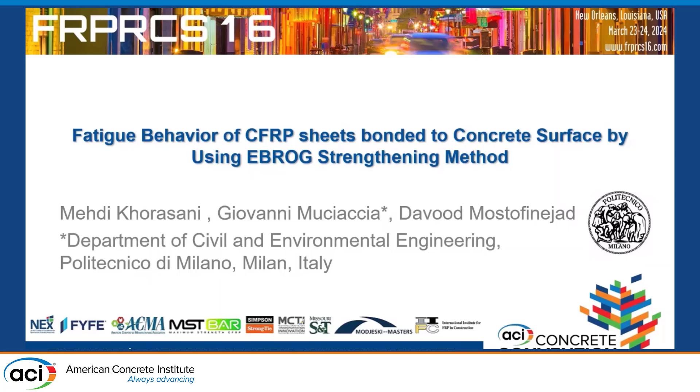As per the introduction, my main focus is typically on innovative cementitious materials and anchorage fastening, so I'm a little bit a guest in the FRP context, and I will try to explain what we are trying to do with the colleagues.

So I will skip this, and let's start from this. Let's consider something a little bit more general. By the way, sorry for the format - I realized during the presentation this morning that something wasn't working with the format we tried to use in the ACI format, so it's a little bit different than others.

One of the issues we know well is when passing from the specimen we typically make in the lab to real structures, we have some boundaries, some geometrical boundaries, which force us to some extent to use specific solutions to guarantee the effectiveness of the strengthening.

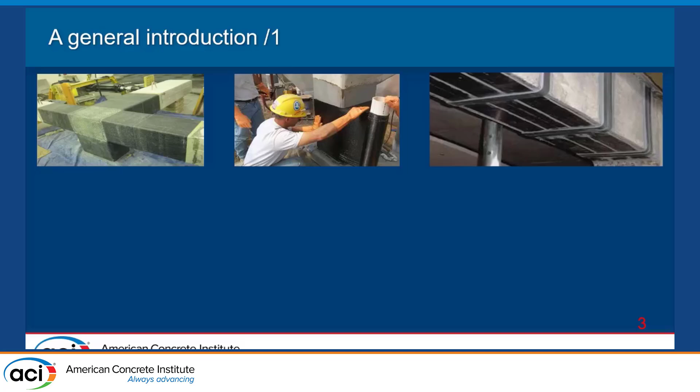One of them, for instance, is the CFRP anchor, on which a lot of this cooperation we started is working, which we are also starting to investigate through experimental techniques and analytical methods more typical of fastening technique, which is what you see on the right.

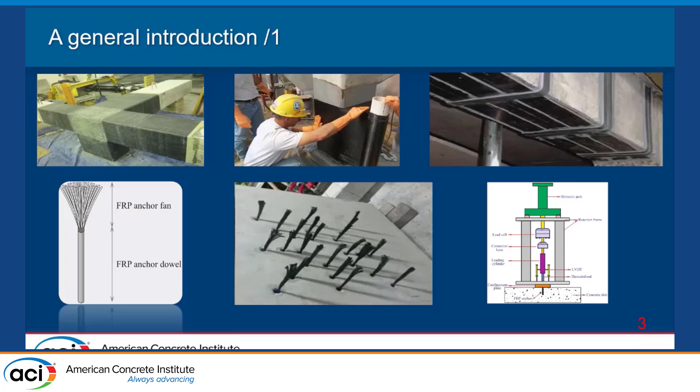In this field we obtained some results which I would like to quickly show. For instance, we started to investigate the sensitivity to installation, regarding how you clean, and what can be the effect of the sensitivity technique, and capacity prediction, which is in the middle, through models more typical of fastening.

For instance, prediction regarding models which look at concrete capacity, or the bond, through models which can be applied to different conditions you may have, and this seems to work pretty well. Or even the behavior under temperature, evaluating the decay, for instance bond strength, through techniques borrowed from other fields. This is a little bit to give you the idea.

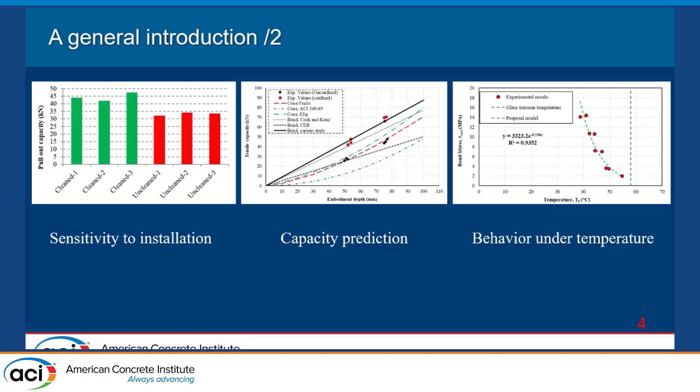Even if I will not focus specifically on FRP anchors today, as you may see from the presentation, but on another technique which may be used when we have geometrical boundaries, maybe developed by the colleagues in the past, which you may know - I can skip this - when you basically have some issues in the anchorage, you may want to use some grooving methods.

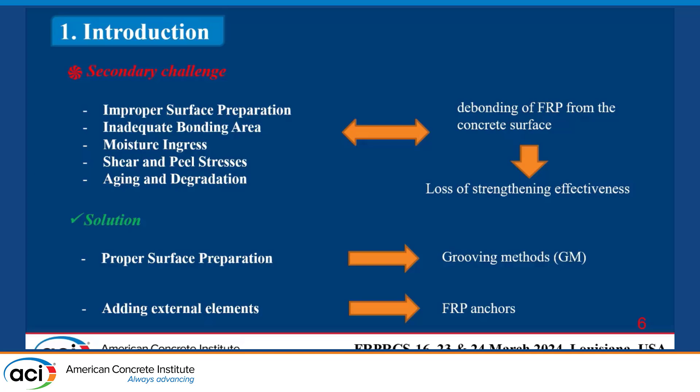So grooves basically are here. Assuming that this will not... okay. You know well the basic preparation you may have in the standard case, and also some techniques coming through the last year, so near surface mounted. The grooving basically consists in wanting to have some mechanical interlock which may help us a little bit. We cut through the concrete, and then we let the resin go in.

Of course this may be coupled with other things which are under evaluation today, so having in the groove not only the resin or matrix, but also, let's say, to have the strip which can go through the matrix. Anyway, these are coming - let's put it like that.

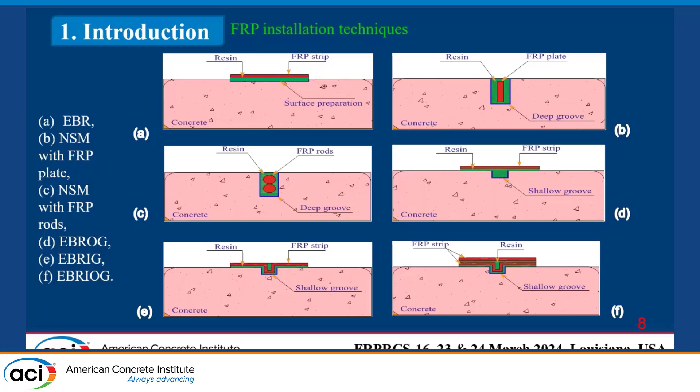I will focus a little bit today on this specific technique in one specific condition, which is the assessment of the fatigue behavior, or specifically the resistance in this case, as we'll see. So what I will talk about in the next minutes is the evaluation of the efficiency of the EBROG method on bond properties of FRP composites under fatigue loading.

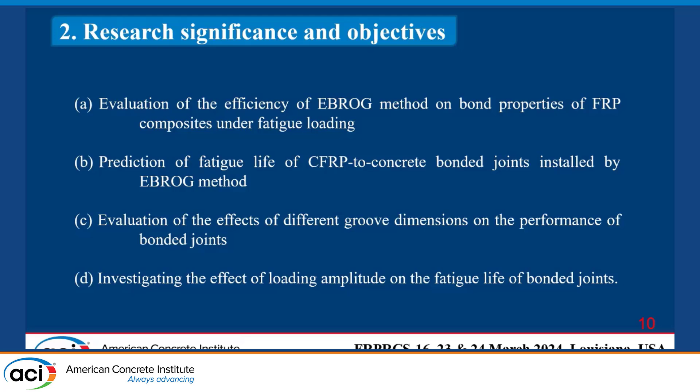We try to see if this can be predicted somehow, and show some possibilities: the evaluation of the effect of different groove dimensions on the performance of the joints, and a little bit the effect of the loading amplitude on the fatigue life of bonded joints.

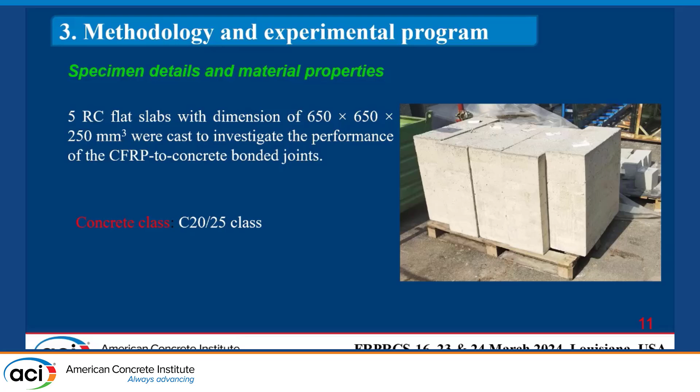So to the scope, we casted some specimens in our lab, so we casted our slabs. The concrete class is the basic one.

This is the bonding material, the fiber adhesive that we use, not because we had some specific agreement with the manufacturer, just because it was available on the market, so we're also promoting somehow this, but it's indirect.

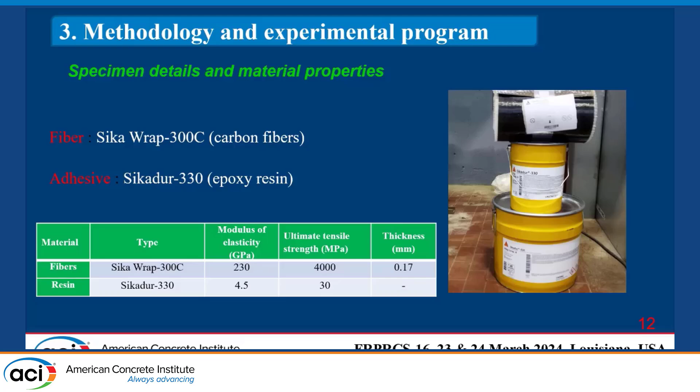So the methodology of preparation: this is the procedure we follow for the standard method, the standard bonded reinforcement. We remove the weak thin layer of concrete, then apply the epoxy-based adhesive, and then the sheets after impregnation, as known.

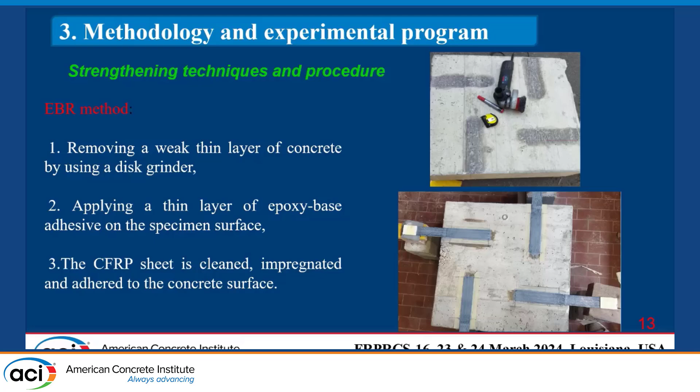I just want to stress the only difference we have in the EBROG method: before doing the rest, you cut the concrete.

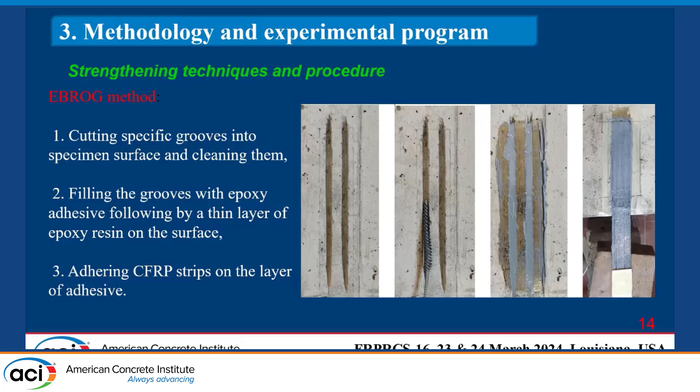This was done through lab tools, which can actually be easily available also on the job sites. You cut through the concrete, then you clean—this seems trivial, but it's not—here we see some brushes. Then you proceed with putting the resin, and then we go on with the impregnated FRP sheet.

Now there are these typically awful tables in presentations taken from paper, which are impossible to understand. I want to focus on just one thing here; you'll find the details in the paper if you're interested.

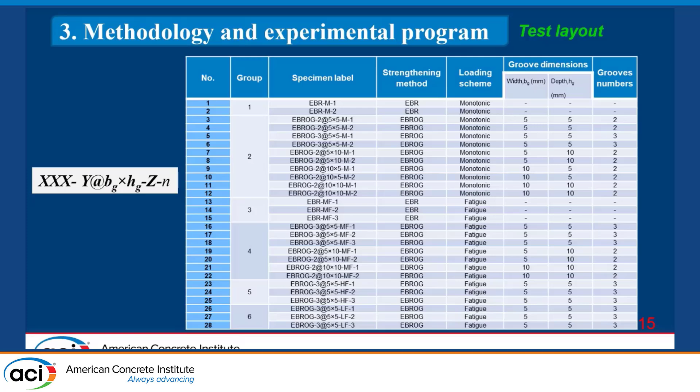We tested external bonded reinforcement with grooves, checking monotonic behavior and fatigue behavior, varying the size of the grooves—the width and depth—and varying the number of grooves. These are the parameters we checked, composing the test layout, and for each specific combination you find all the details in the paper.

This is the test setup that we have in Milan. This was mainly developed by other colleagues in the past, and we are basically pulling parallel to this surface, with the specimen locked to the floor, because of the bending induced in the specimen.

The only thing I want to stress is that we have some vertical supports here, and we also put a camera for data acquisition to process a little through DIC.

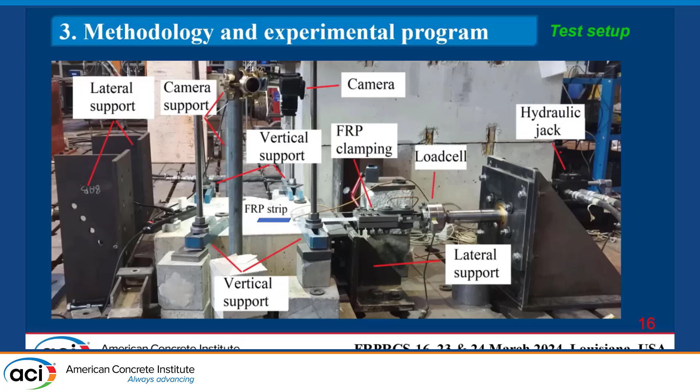Comparing the results, I can show you which shows better—comparing also the result of DIC with some more classical measurement, for instance through some LVDT. So here you have some side view and the top view; the details are basically the ones I explained.

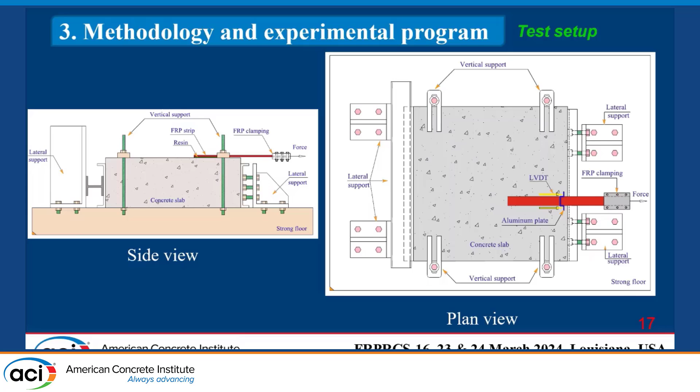As for fatigue, in particular, now what we can see is that while the video runs, while you are going through the cycle, we check several things—of course we check this. Let's say not inverse loading, it was not the scope.

We basically cycled through different load levels without complete unloading, also because this would not correspond to a real situation, investigating a little the effect of the amplitude. In the end I will focus mainly on the maximum load achieved, but it was also to show that we always keep a minimum load. The frequency was decent, also with respect to the number of cycles we achieved.

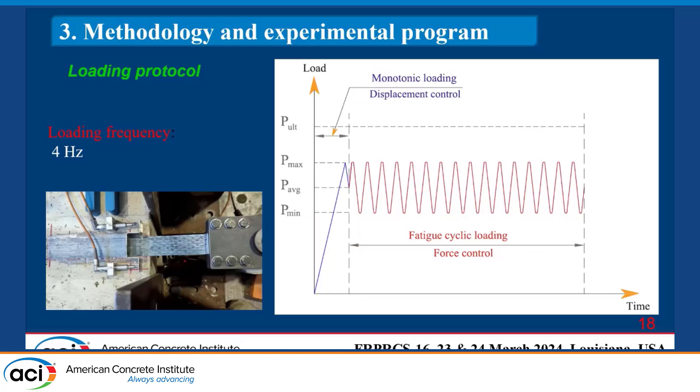Before looking at the results, I think it makes sense to look a little more at the failure mode, because something interesting comes out. Here you see the failure after monotonic testing and after fatigue testing, and it's interesting to see there is a transition in failure mode somehow.

It's more evident in the standard installation without grooves, but you basically see that the failure surface moves from the adhesive-to-concrete interface to within the adhesive. This is very evident in the absence of grooves, but also a little, as you can see, even when we have grooves, the surface is more clean.

There was an interesting presentation earlier regarding how we can quantify the parts of adhesive and concrete at failure through evaluation of images, and I think this can also be applied here.

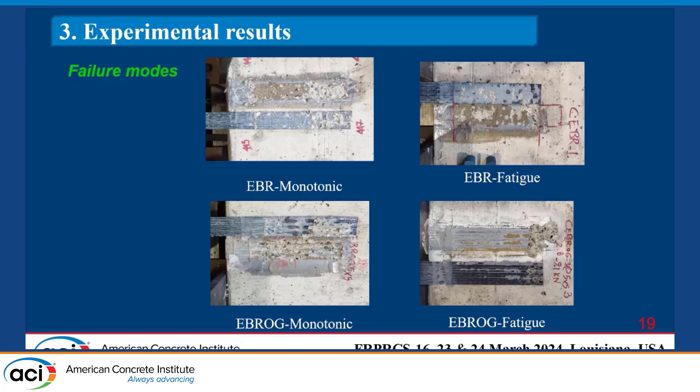Then, as also reported in the past, grooving allows for the same length. We're talking about—it was a picture before—but the strips were 35 millimeters and were anchored 20 centimeters.

And here you can see, if you just look at the total capacity, that we may have with grooves an increase in capacity, okay? But this could be expected.

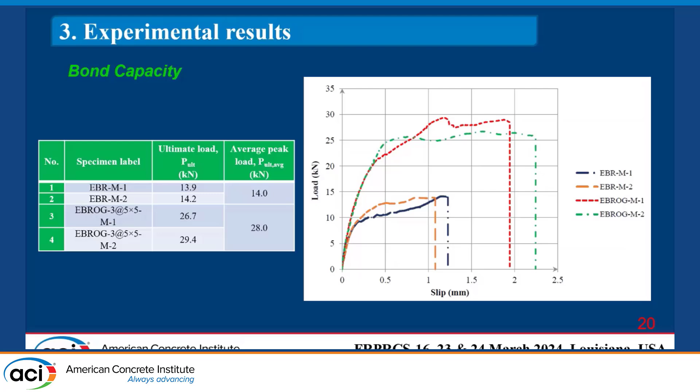This is one of the processing which we have from the images, which shows the strain distribution. When you add the bonding initiation, okay, here 0 is where we have the starting of the bonding length, as also per standard, and also shown in another presentation. There is the initial part, of course, which is unbonded, and this is not shown. So you are just showing the strain distribution along the bonded length, which is 20 centimeters. Here you can see that

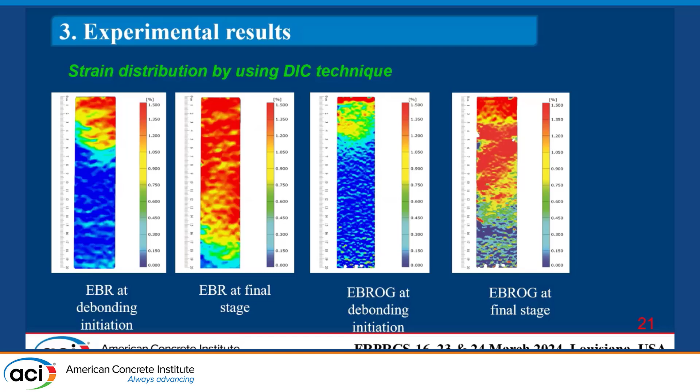external bonded reinforcement, okay, it's initiation and then also a final stage. This is quite spread, while when you have grooves, of course, you are reducing the transfer length, so you are concentrating more in the initial part. The latest part, I would say, it's quite ineffective, so I can skip this because it just says the same thing that you were saying before.

And I think we can use these 2 minutes to focus on this. Okay, so this is, again, one of these awful tables with results which are not clear, but let's see what we can extract from this. So let's start from the standard. In absence of grooves, we cycle between 2 load levels, so 20% of the mean capacity and 65%, which gives us some specific load levels in terms of load values with a given number of cycles at failure.

So if we keep the same load level, okay, so we keep the same maximum, for instance, 65% of the mean ultimate capacity, but with grooves, the number of cycles that we can get is lower, of course, because this corresponds to a higher load level. But if we keep, for instance, the same load values, so absolute values, which were detected in the initial case compared to the case with grooves, which is what you can see here, then the number of cycles dramatically increased. So we got 1 order of magnitude more. And this is the result I would bring home, okay, as for now.

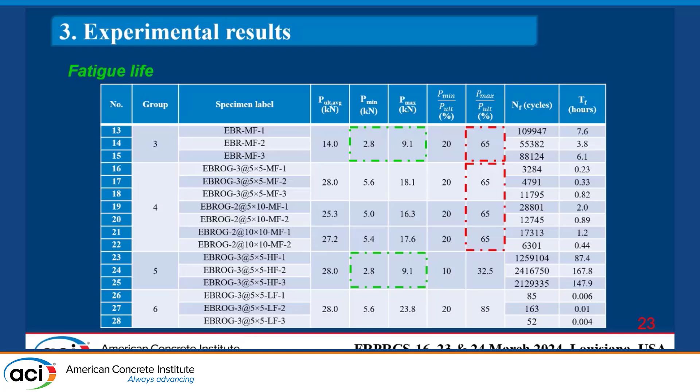Just to say, and then I conclude, as to say that this can be very effective if, for instance, we want to just count, okay, so there's additional mechanical interlock, in case we can have maybe also the same transfer length, but we want to increase, okay, the fatigue life.

This is just a graph which reports as a function of the load level and the number of cycles, which is typical, no? Relationship between these 2 parameters, and this is just a purely brutal predictive equation which shows, okay, how this can decrease. We try to apply models which are existing in literature, not developed for grooves, and they don't work, of course, so we had to develop some models, but just to show that at least from a semi-qualitative point of view, this can be predicted.

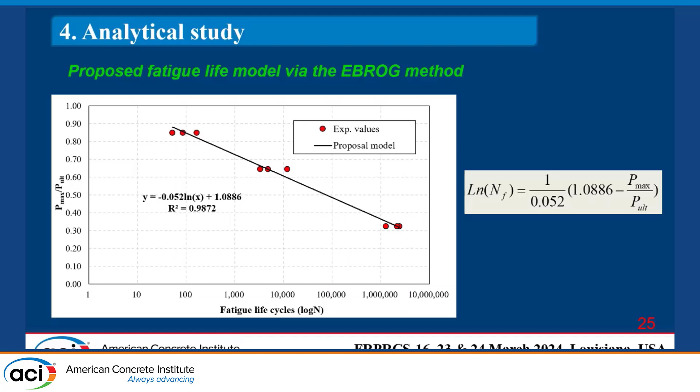So I should be in time. So just these 3 main conclusions are that we can have a significant increase in the number of cycles by using the EBROG method compared to the EBR method at the same loading levels. This is important. Load amplitudes, as well known, affect the fatigue life of bonded systems, while reducing the maximum applied load increases the fatigue life, of strengthened joints, and just proposing for the moment a predictive equation based on the maximum applied fatigue load for this type of